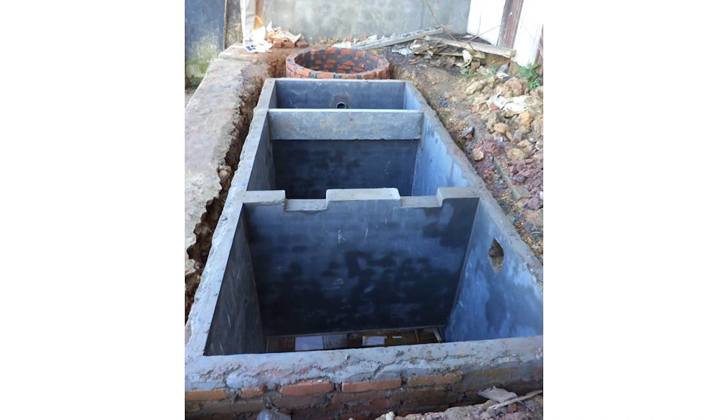The sanitation system which existed at that point of time was latrine with septic tank. The soil nature being predominantly rocky, soak pit was not a very successful component functionally. The project aimed to introduce best practices for septage management in the state of Mizoram. It focused on organizing the existing sanitation system with a sustainable septage management backed by engineering logics. Building a new sewerage system was beyond the scope of this study.

Different septic tank sizes with user numbers, outlet levels, its location within the premises were thoroughly investigated and analyzed. Septic tank standardization was formulated and a nomenclature on septic tank designation was established. The basis of designating septic tanks was based on some parameters: user's number, size or volume of the tank, location which dictates septage withdrawal pipe length, cleaning mechanism, location of the premises with respect to hills or valleys, accessibility of

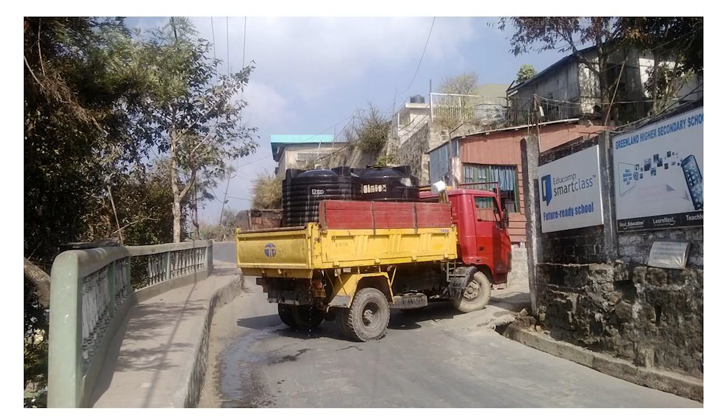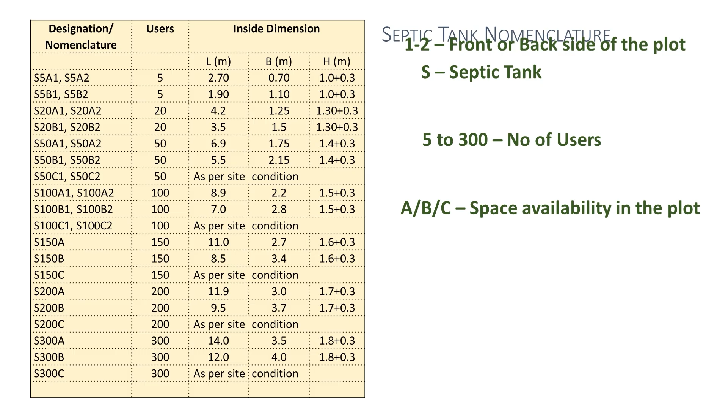roads, etc. For example, if a septic tank is designated by the nomenclature, say S5B2, then S symbolizes septic tank, 5 is the user's number, B designates space available within the plot, and 2 indicates whether it is on the front or back side of the premises.

There was a long-term vision of the project authority in respect to cleaning activity, keeping in mind that in future cleaning activity can be through online services where each house or premises will be connected through MIS and integrated with GIS. The approach was basically to introduce a smart cleaning mechanism, though 10 years back this word smart was not that popular. If an owner puts an online request through mobile apps for septic tank cleaning, all details will automatically be known to the operator.

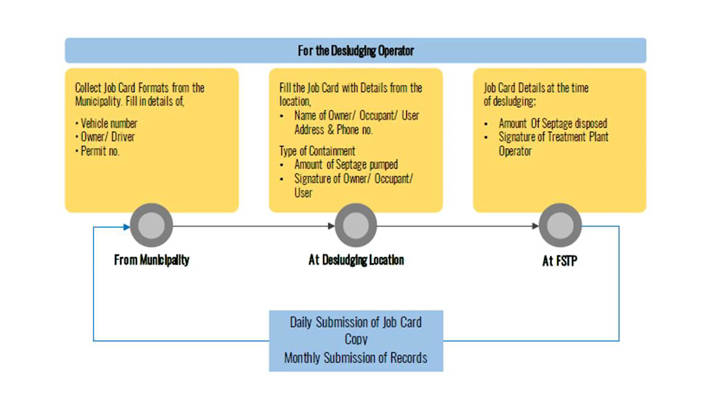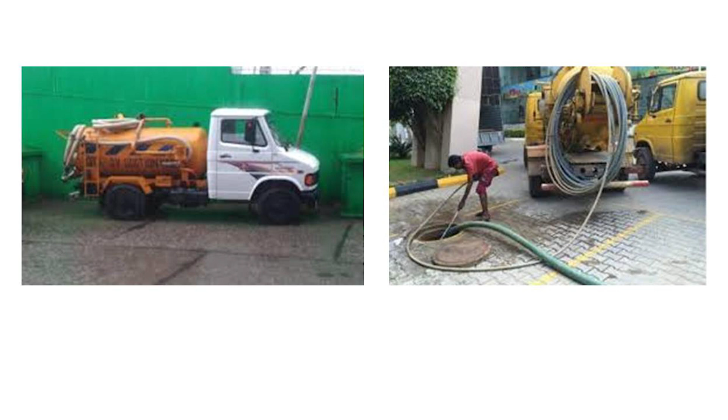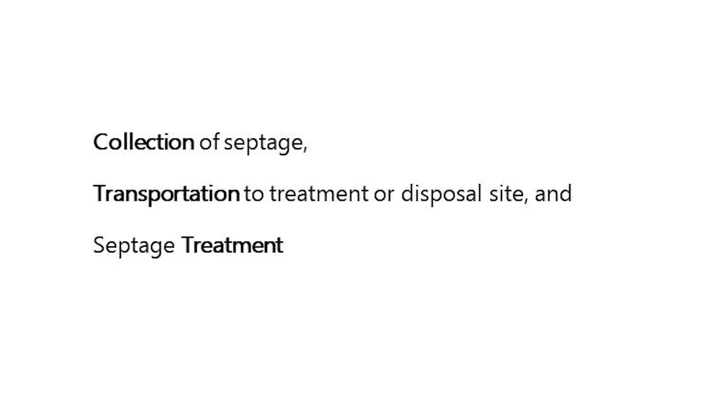Accordingly, the operator will get an idea on the size of the tank to decide capacity of truck, position of the tank to decide length of suction pipe, and nature of route to decide the route pattern, and available space for the truck and emptier to park during the cleaning operation. The major components of septage management can be broadly divided in 3 activities: collection system of septage, transportation to treatment location or disposal site, and treatment process.

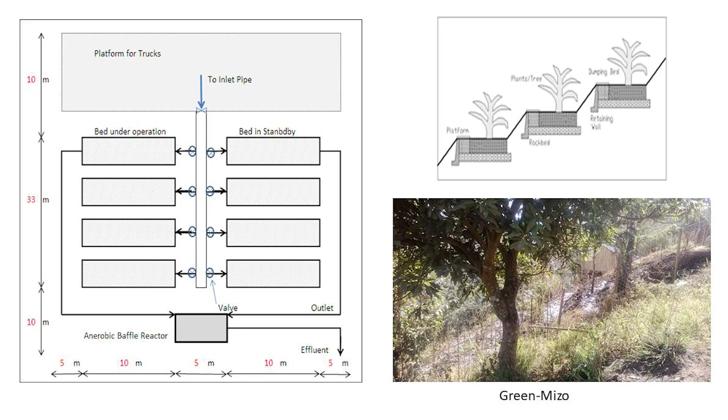Treatment was proposed as a traditional method. The site was proposed to be developed from technical point of view, keeping in mind the factors of earthwork balancing, natural gradient, nearest natural stream, access road, power availability, etc. Operation sequencing was also developed. It was predominantly a natural process which was sustainable from social, economic, and most importantly, environmental point of view. A catchy name was given, Green Mizo, as it resembled an environmentally friendly management system.

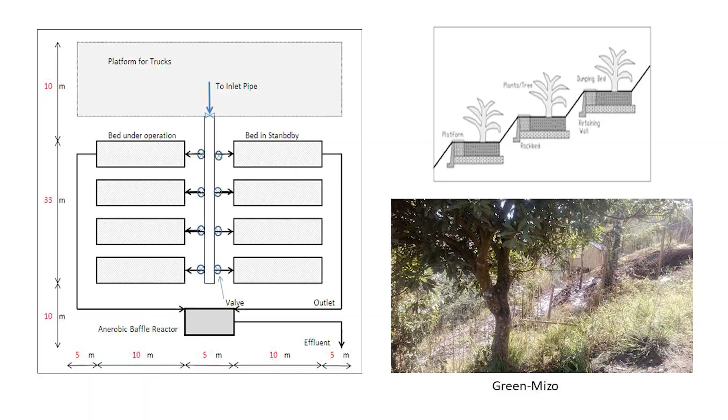Collection of septage was a challenge. In some pockets, the road being narrow, it was not prudent to go for higher capacity emptier, even if the septic tank size was large. The ground situation required multiple trips for single cleaning activity. These criticalities were considered during planning stage. In some cases, septic tanks were at a much lower elevation than the road elevation. The pipes and the pumps were proposed to be customized. All these critical site situations were thoroughly analyzed and septic tank nomenclature was formulated accordingly.

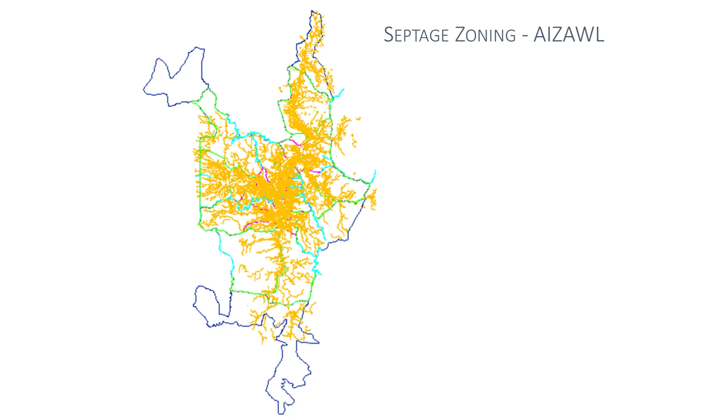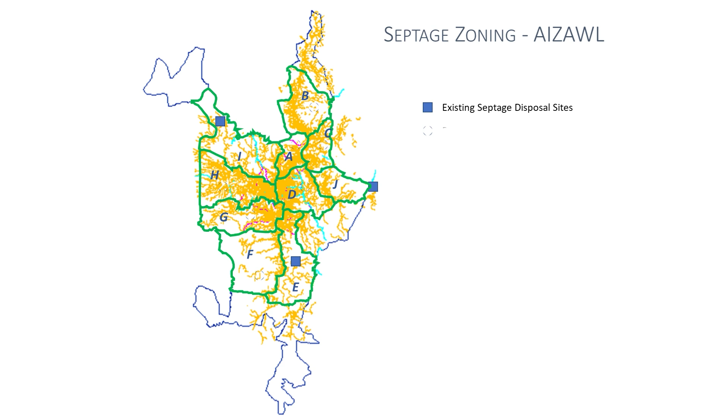The biggest challenge was to transport the septage from collection point to the treatment unit. Let me discuss the challenges in detail. The area of the city was divided as zones for septage management. Each zone will have one septage treatment system. The septage transportation route was optimized within the respective zone. Zoning was required not only to optimize the route, but it also facilitated institutional framing.

First challenge was the selection of route from each locality to the designated treatment site. The road width being narrow, most of the roads within the main city center and its vicinity were one-way traffic. Hence, an intensive route planning was done with time slots. Here, optimization of route was linked with fuel consumption. Optimizing fuel consumption is one of the main parameters. It involves a combination of effective driving techniques, proper vehicle maintenance, and thoughtful planning.

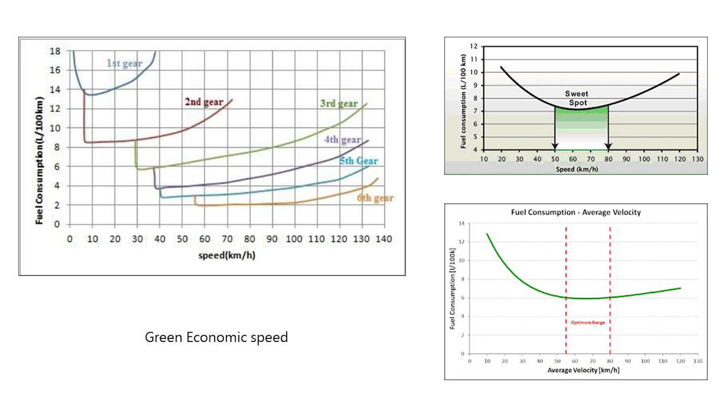The deciding factor for obtaining green economic speed where fuel consumption will be least depends on longitudinal slope, nature of the road, traffic condition, maintaining momentum, and most importantly, driving techniques. We took consultation of a subject expert on this. Though ideally a speed of 50 to 80 km per hour is an economic speed, in that topography, mainly near city center, achieving more than 20 km per hour during daytime was a blessing. So, the subject expert considered the ground situation and analyzed the optimum route accordingly.

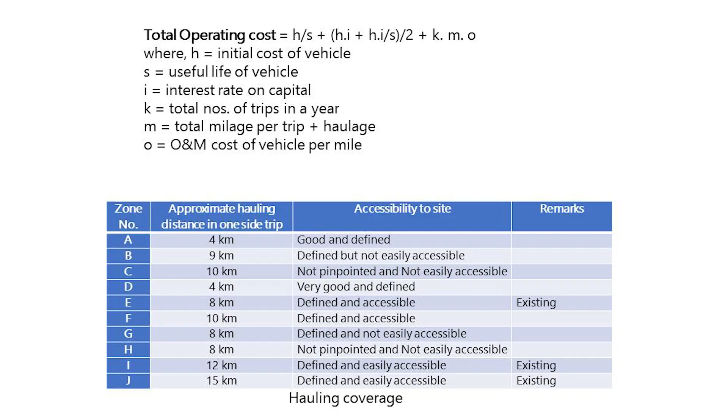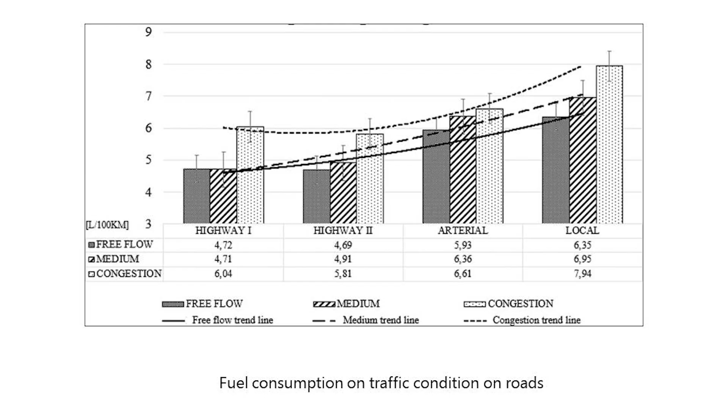Driving efficiency in hilly roads increases with minimum usage of engine braking, avoiding aggressive driving, staying in mid-range gear as far as possible, leveraging vehicle momentum and inertia, etc. Good drivers always use predictive driving. Total operating cost depends on initial capital cost, its life, interest rate, number of trips, total mileage per trip plus haulage, maintenance cost per mile. Equivalent annual cost versus output in kilometre was also derived for different cases. Accordingly, optimum route was finalized.

As per my experience, we, the consultants, give more effort on selecting treatment methods and investigating septic tank details. But to achieve a comprehensive, sustainable solution for septage management in hilly towns, route planning and its optimization is the most important activity. Hope I am able to share my perspective on this topic, assuming that the proposed solution will be implemented on ground and not to showcase as a document for project funding approval.